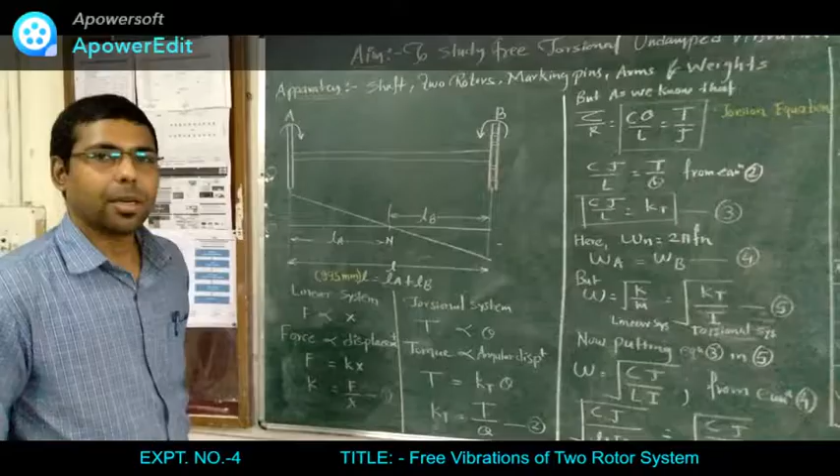Today we discuss how to study free torsional undamped vibration of a two rotor system. The apparatus required for this practical are a shaft, two rotors, marking pins, arms and weights. So let us have a look at the two rotor system first.

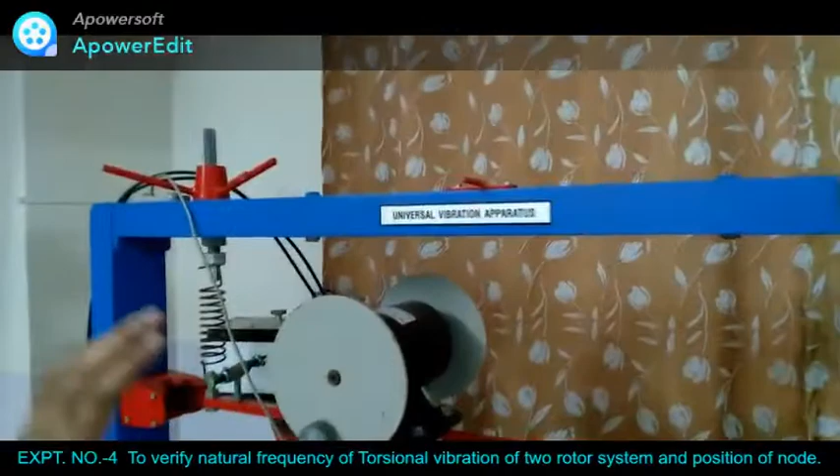So dear friends, this is a universal vibration apparatus on which we can conduct many experiments. This is the equipment for forced vibration, this is for the two rotor system which we are going to discuss today, and this is for torsional vibration which we will discuss later on. So first of all, let us have a look at this apparatus of the two rotor system.

There are two discs. This is disc A. This is disc B. Between these two discs, disc A and disc B, there is a shaft. You can see this is the shaft, and we are actually trying to find the frequency of the shaft.

On the basis of the torsional equation, we are going to find the node points of this shaft, and node points are those points where failure is likely to occur, and we'll be finding that right after. If you consider disc B, there are two holes. These two holes are there to mount the arm, as well as to locate the weight.

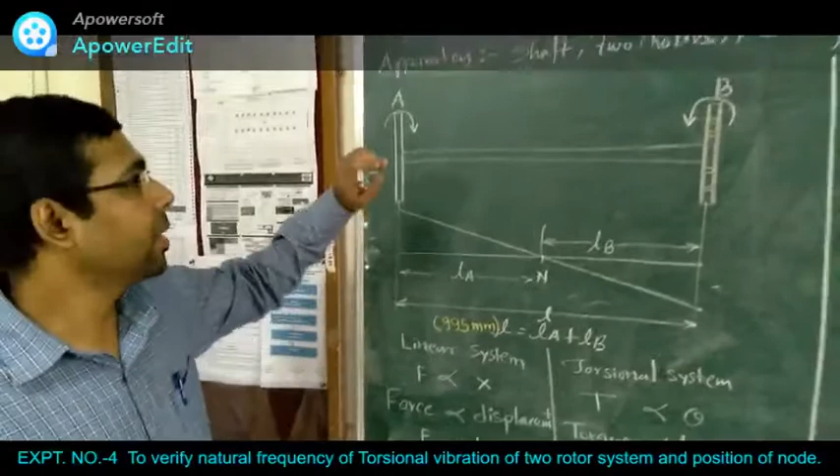So we will find the effect if we increase the weight on any of the discs. If we increase the weight, what happens to the node point is what we are going to observe from this experiment. So let us try to understand the theoretical part of this experiment first.

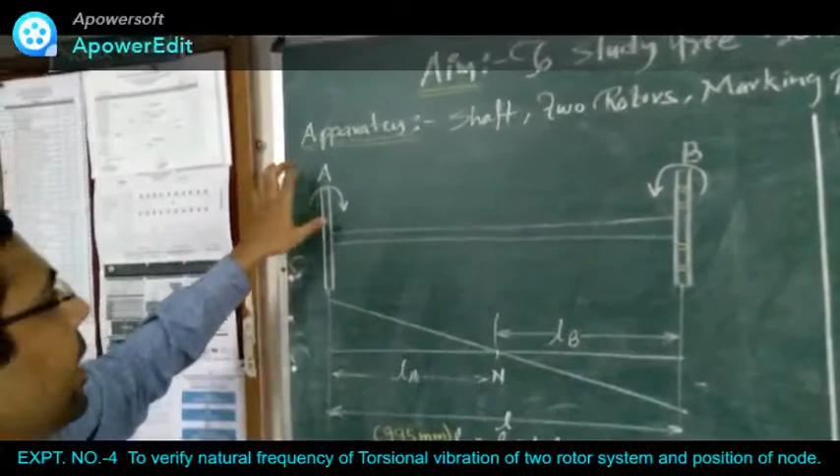This is a two rotor system with rotor A and rotor B, such that we will be rotating rotor A in a clockwise direction and rotor B in an anti-clockwise direction. After that, we will observe a T theta diagram like this, and in this T theta diagram we locate the total L as the distance between rotor A and rotor B, such that after twisting it, we will be able to find the node point N.

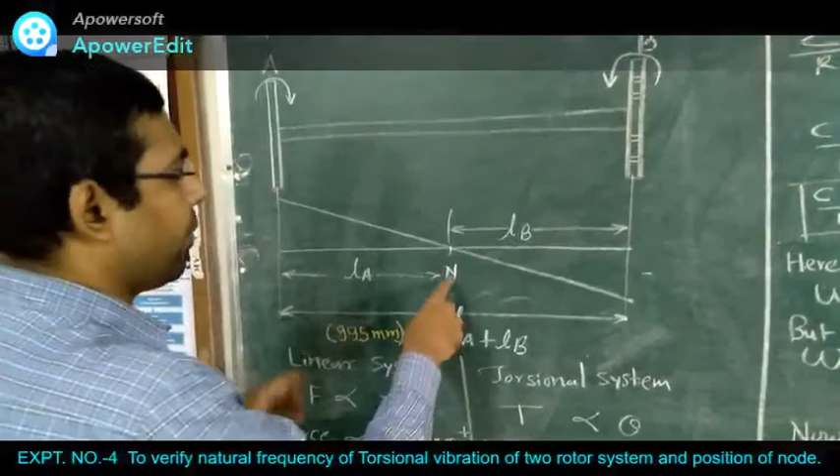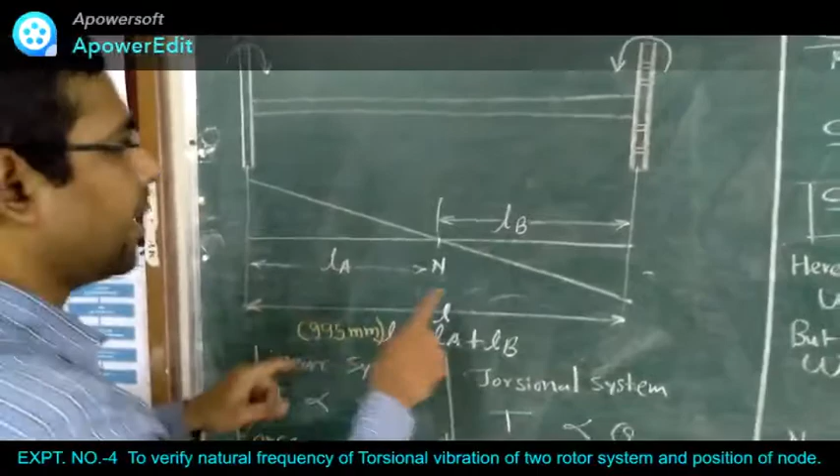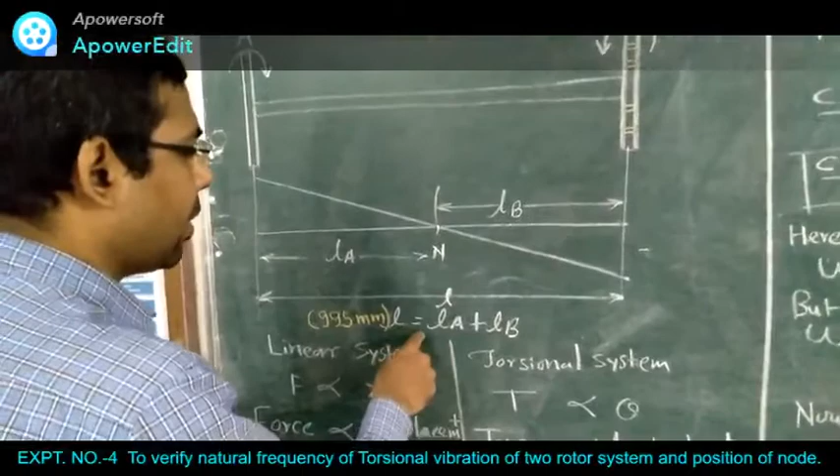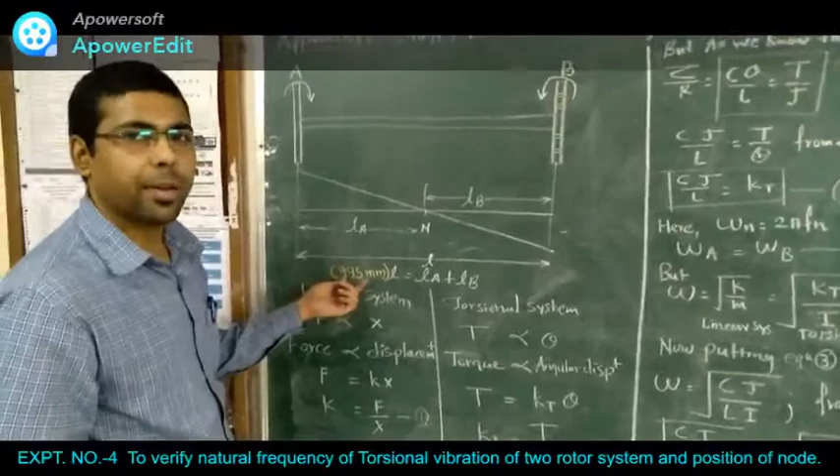So we consider the distance from the node point to rotor A as LA, and the distance of the node point from rotor B as LB, such that the total distance L is equal to LA plus LB. This is the theoretical concept we are going to study, and the total length of the shaft is considered to be 995 millimeters. It is actually 1 meter, but a certain amount of shaft gets consumed while fixing the rotors on it, so it is considered as 995 millimeters.

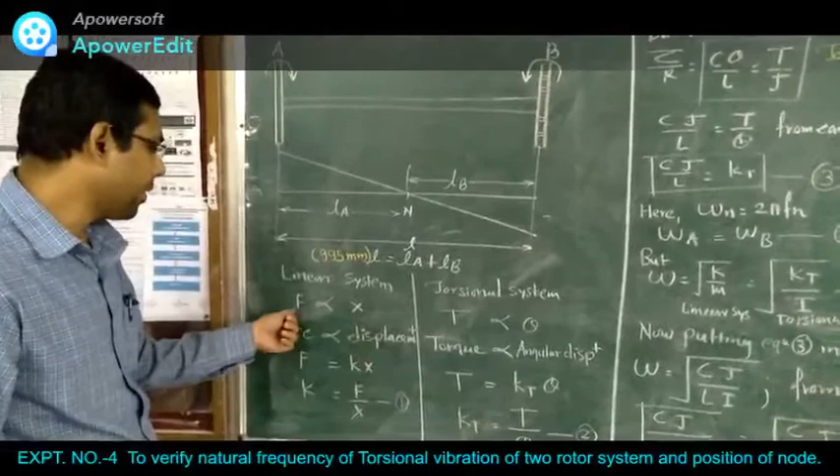As we know, there are two types of systems: a linear system and a torsional system. In a linear system, force is directly proportional to displacement. We take force as F and displacement as X. Generalizing this, force is equal to K into X, where K is the stiffness of the shaft. So in a linear system, stiffness is given as K equals F by X. This is the stiffness equation obtained through the linear system.

But consider the torsional system, a system like this where torque is applied. In this system, T is the torque, and torque is directly proportional to angular displacement, such that torque is equal to Kt into theta, where Kt is the torsional stiffness. So Kt is equal to T by theta. This is equation number 2.

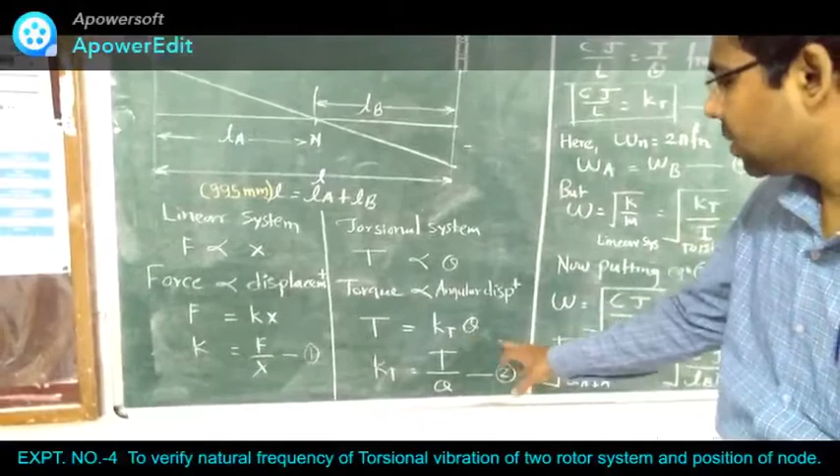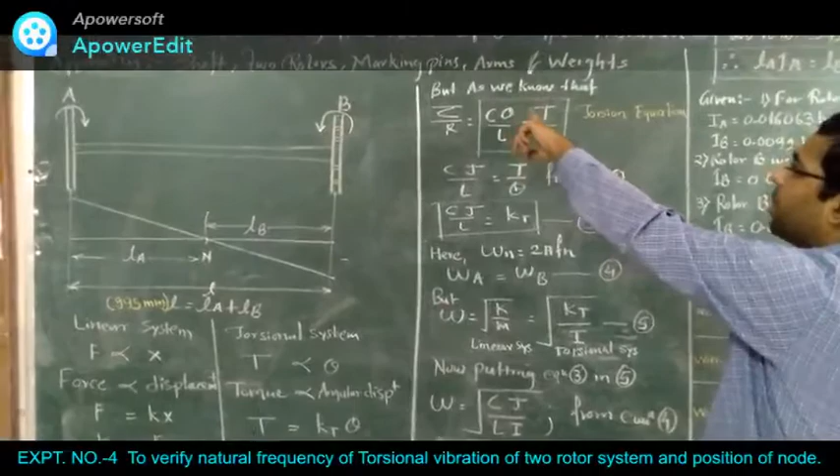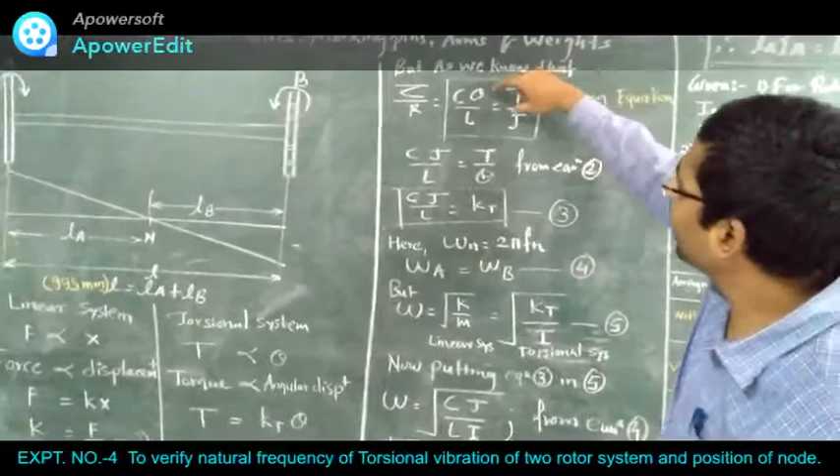After that, there is the role of the torsion equation in a torsional system. We consider the torsion equation, tau by r equals C theta by L, which is equal to T by J. This part of the equation we use for the calculation. As C theta by L is equal to T by J, rearranging these terms, T by theta is equal to CJ by L. This is the rearrangement we have taken here.

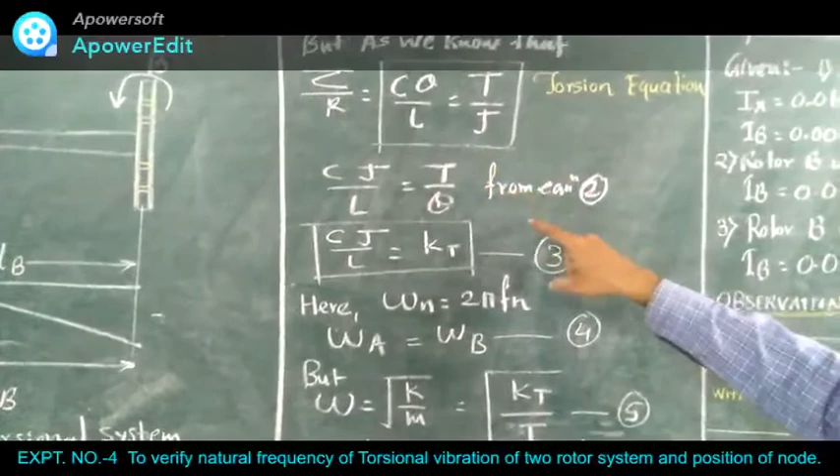So from equation number 2, as we know, in this equation we obtained T by theta and a certain value related to T by theta here.

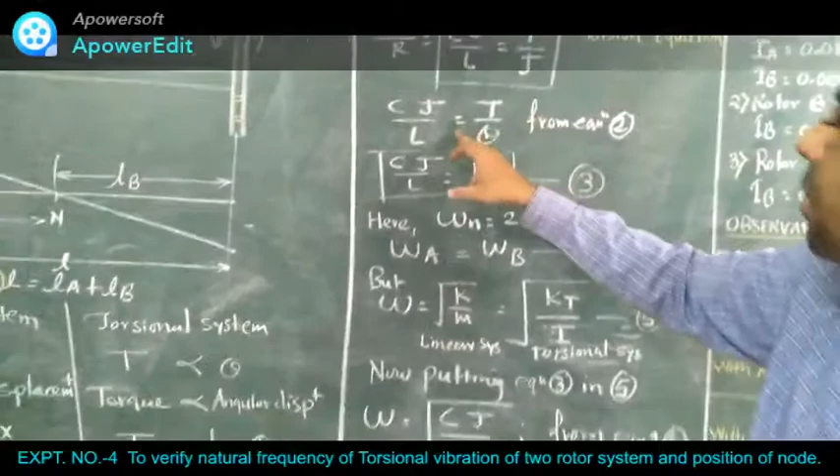So we can say that from equation number 2, kt is equal to cj upon l. So this is the equation which we are going to use for further calculations. Okay. So now here we are going to consider, as we know that omega n is equal to 2 pi fn.

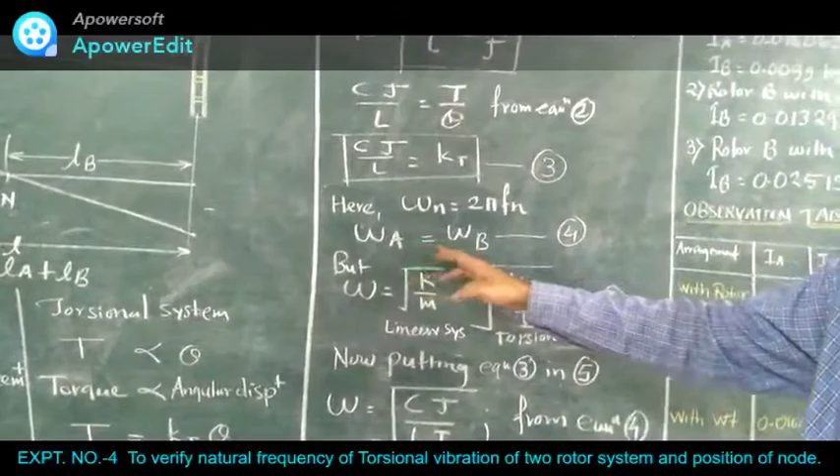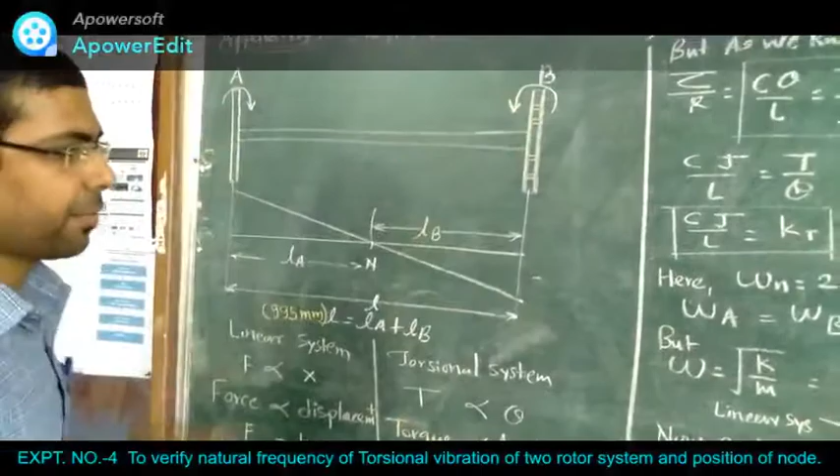And as we are aware about torsion, we can say omega A is equal to omega B, because the frequency of rotor A is going to be equal to the frequency of rotor B, since they both are mounted on the same shaft. So omega A will be equal to omega B, and as we know, omega is equal to under root of k by m, which is equal to under root of kt by I in case of the torsion equation. We are replacing k by kt and m by I.

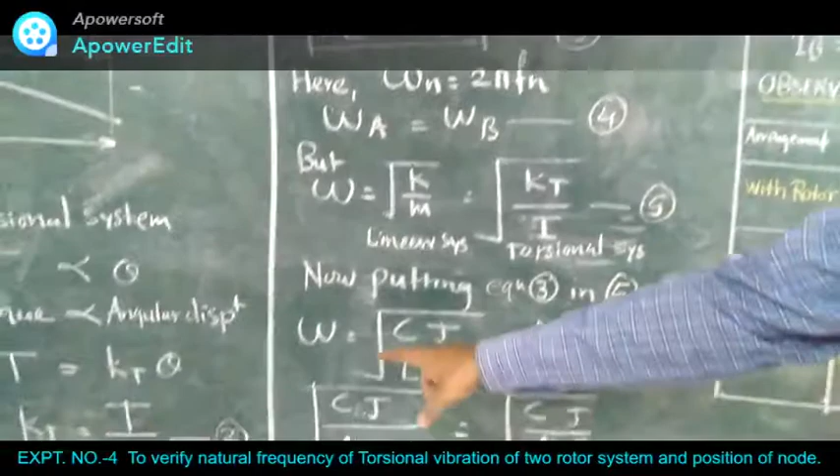As we know, k by m is for a linear system and kt by I is for a torsional system. Now put equation number 3 in equation number 5. By putting this value, we get omega is equal to under root of cj upon lI. Now we use equation number 4, which is omega A is equal to omega B.

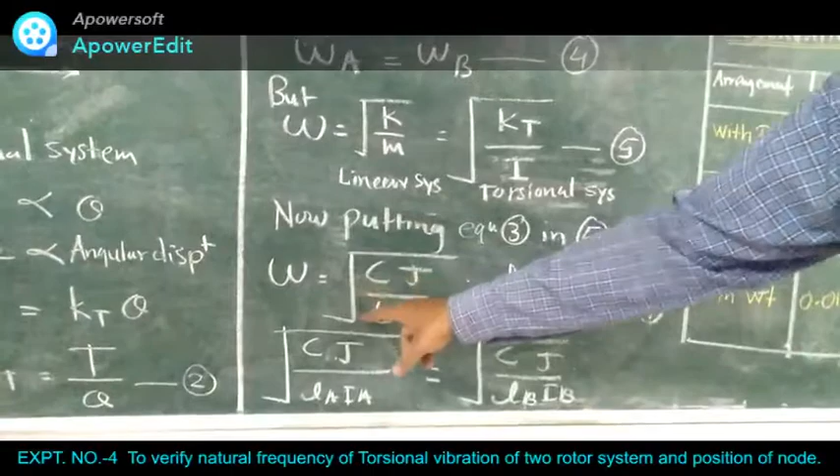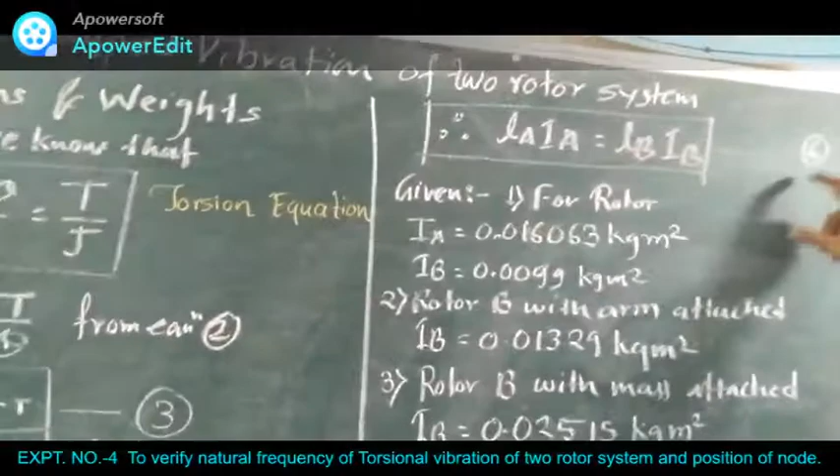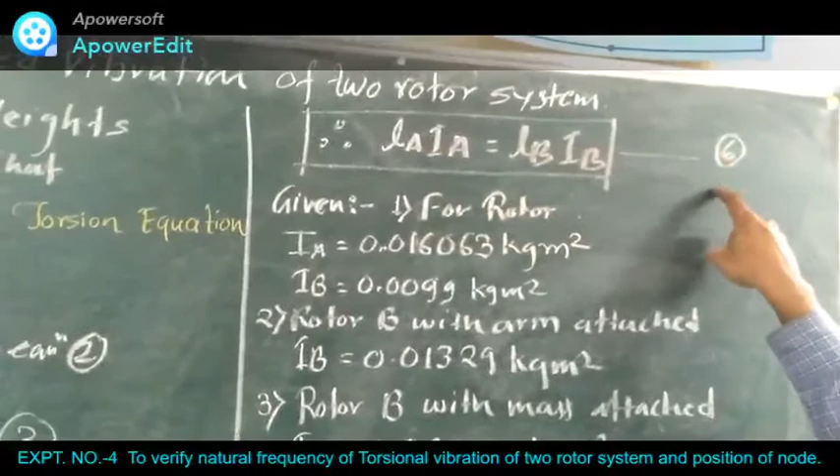By putting this value of omega, that is omega is equal to under root of cj by lI, in equation number 4, we get under root of cj upon lA IA is equal to under root of cj upon lB IB. By cancelling out similar terms and the root sign, we get lA IA is equal to lB IB, which is our equation number 6. By rearranging equation number 6 we can get the value of lA as well as lB.

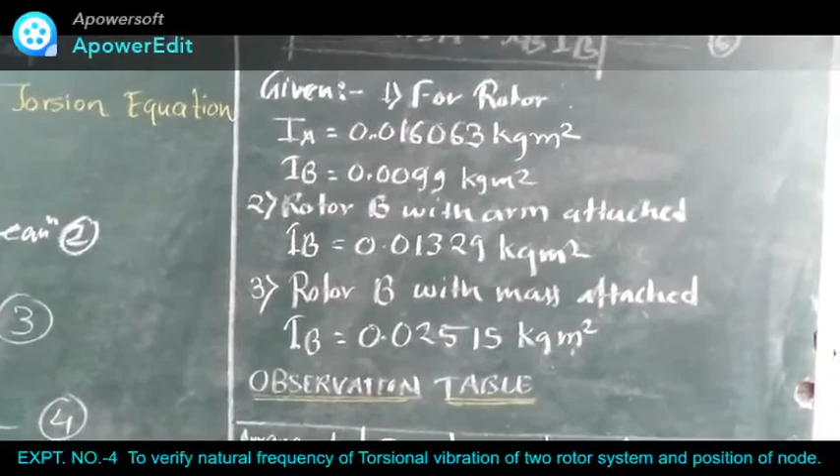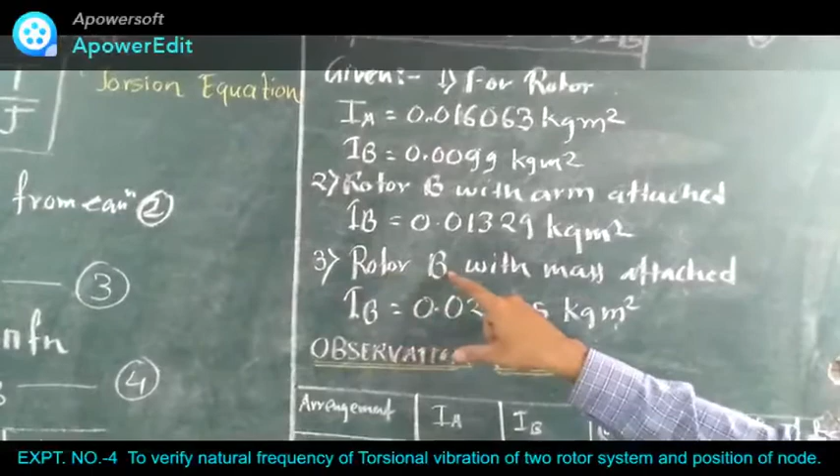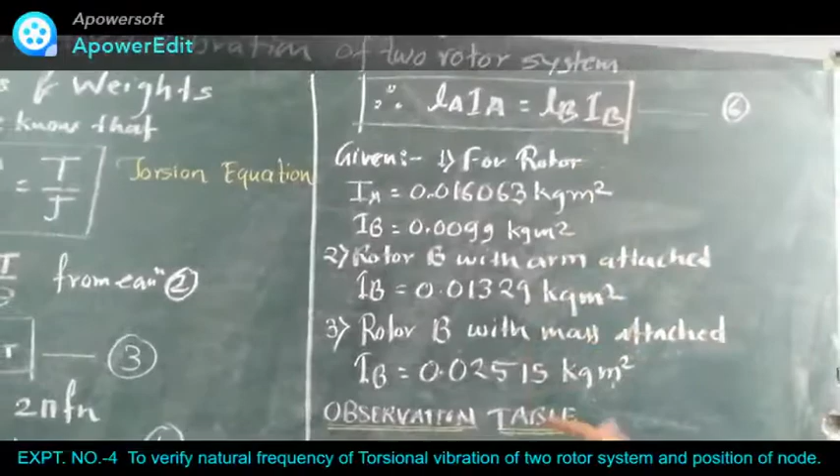Now we have certain values given in the specification. For rotor A, IA is equal to 0.016063 kg meter square, and IB is given as 0.0099 kg meter square. If we put the arm on rotor B, IB changes to 0.01329 kg meter square, and if we put mass on rotor B, IB changes to 0.02515 kg meter square. The observation table we will discuss later, after our experimentation.

So now let us have a look at our apparatus. This is our rotor A, and this is our rotor B. To rotor B we can attach arms and weights, and this is our shaft, and these are the jaws where the shaft is held.

If you want to measure the frequency of the two rotor system, we have to count certain oscillations. We can go for 5 or 10 oscillations, but let us take 5 oscillations. We start, stop after 5 oscillations and measure the time required, then calculate the time period for a single oscillation, and the reciprocal of the time period will give you the frequency. Okay, so let's get started.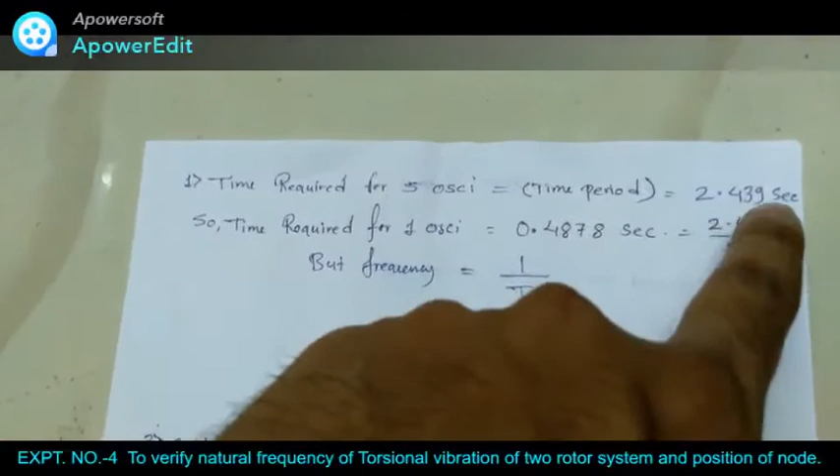So start, stop. Now you can see the stopwatch shows 2.43 seconds. In the calculation part, the time required for 5 oscillations is 2.439 seconds. So the time for one oscillation is 2.439 divided by 5, which is 0.487 seconds. Frequency is equal to 1 by time period, so 1 by 0.4878 gives f practical.

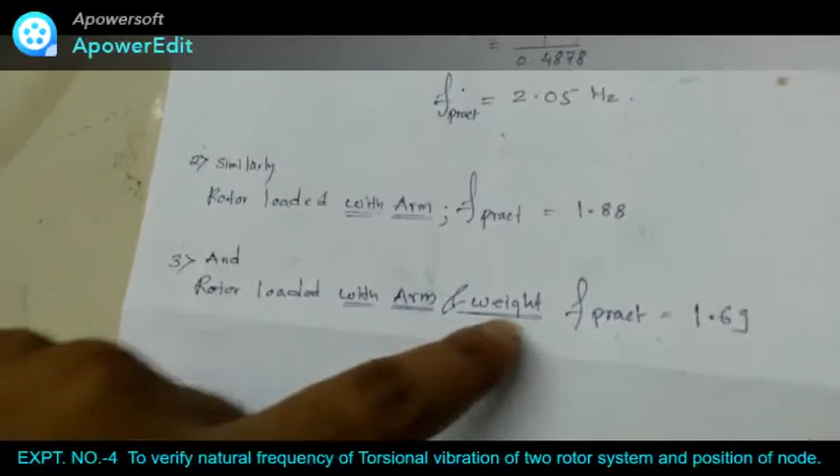It comes out to be 2.05 hertz. Similarly, we found the frequency with the rotor loaded with the arm, f practical is 1.88, and with the rotor loaded with arm and weight it is 1.69. How it is coming, we'll see in the practical. Now we are attaching arms to rotor B.

This is the arm to which we can attach mass also. So we are fixing both the arms. This is arm 1. So we have fixed both the arms, and now we are finding the frequency while loading the arm. After loading the arm, we are going to find the frequency of the rotor. So let's find it out.

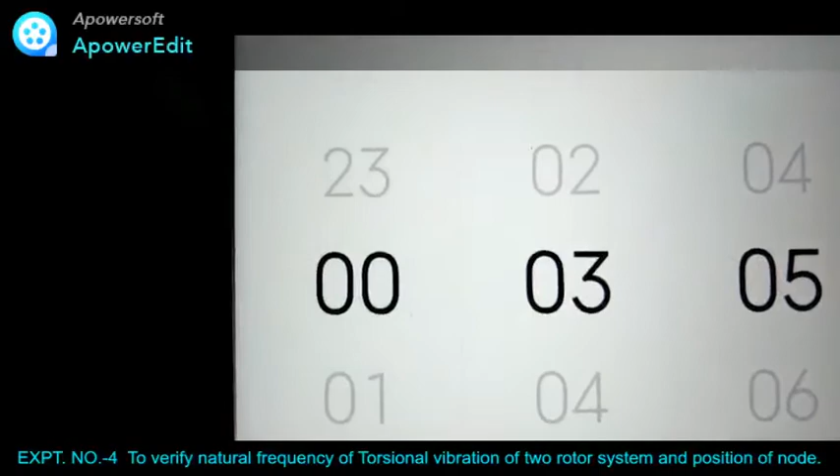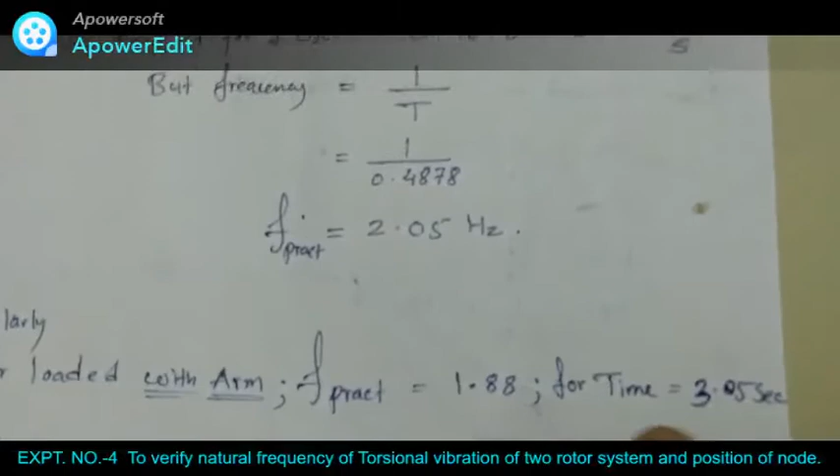Start. Stop. So now you can record the reading. You can see that it is coming out to be 3.05 seconds. So for 3.05 seconds, for the rotor loaded with arm, F practical is coming out to be 1.88.

Okay, now we are going to load the weights over the arm likewise. So this is the weight of 0.5 kg. We are loading it over the arm. So let us see the effect on frequency after loading the weight.

So let us count for five oscillations and measure the time. Start. Stop. After stopping, you can see the reading is coming out to be 4.55 seconds in the stopwatch. And now, for the rotor loaded with arm and weight, F practical is coming out to be 1.69 for 4.55 seconds.

We have seen how to find frequency through the practical method. Now we will try to understand how to find frequency through theoretical methods. In order to do so, we have to find LA, which is the length of node from rotor A, and LB, which is the length of node from rotor B, whereas we know that the total length of shaft is 995 millimeter.

So now let us measure the length through this strip. Let's measure the distance over here on the scale. It is near about 37.9 centimeters, so here we can write LA is equal to 0.379.

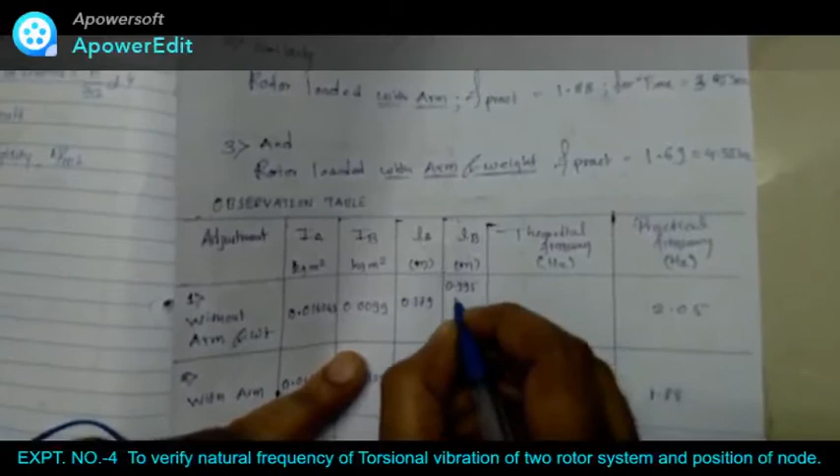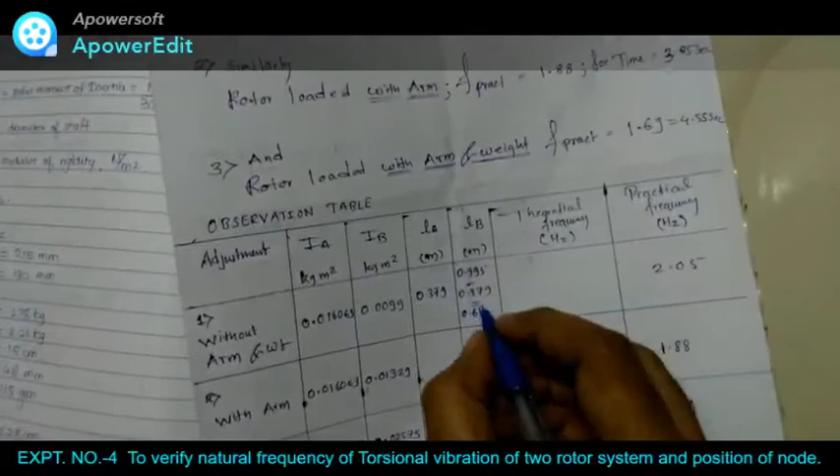So the rest of the distance will be LB, that is 0.995 minus 0.379, which is equal to 0.616. So this will be your LB and this is your LA. In order to find the theoretical frequency, we have to do some calculations. So let's have a look at the diagram first.

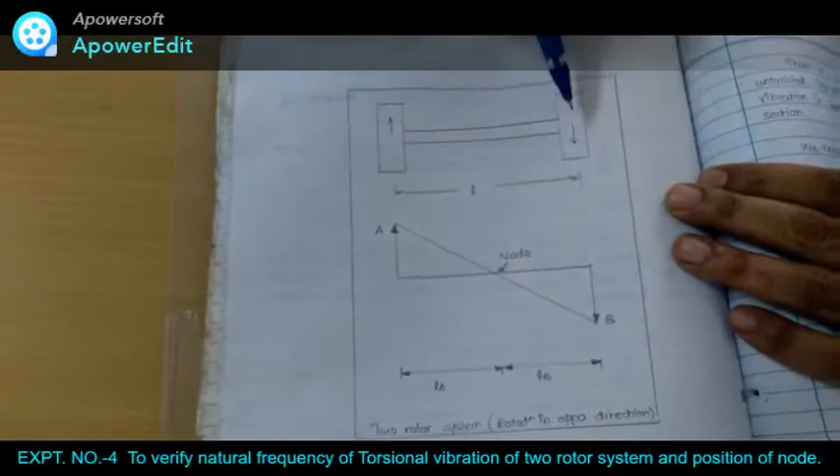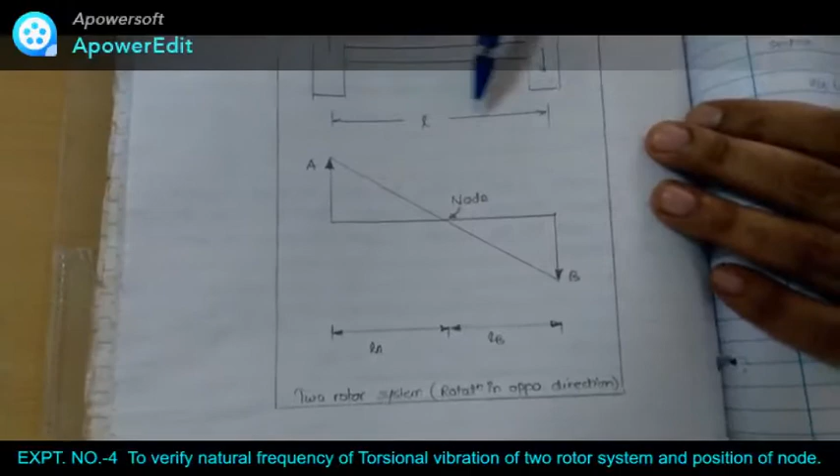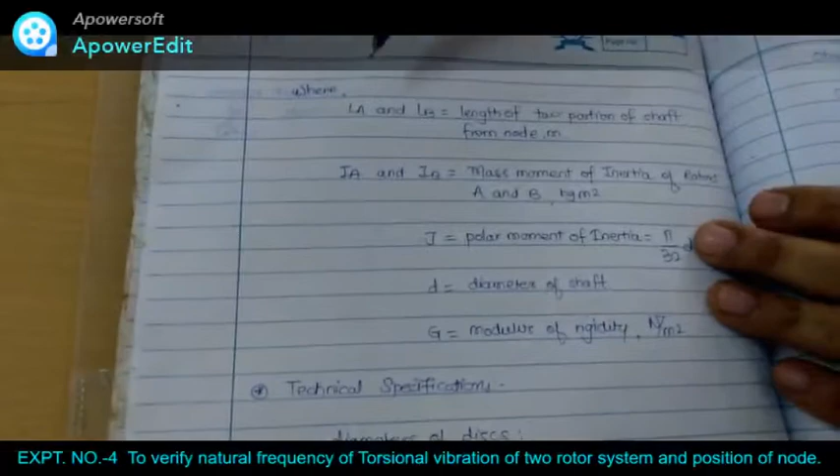This is rotor A, this is rotor B, this is whole length L, this is node point N, such that the distance of node point from rotor A is LA and from rotor B is LB, and this is the T theta diagram. Total length is equal to LA plus LB. LA and LB are the lengths of the two portions of the shaft from the node, IA and IB are the mass moments of inertia, J is the polar moment of inertia, D is the diameter of the shaft, and G is the modulus of rigidity.

Then we have the technical specifications of our system: disc A diameter is 215 millimeter, disc B diameter is 190 millimeter. Masses of the discs are 2.78 kg for A and 2.21 kg for B. Length of arm is 15 centimeter, thickness of arm is 48 millimeter, mass of arm is 115 gram, and diameter of the mass attached is 6.28 centimeter.

Mass attached to the arm is 365 gram. Length of shaft is given as 992 millimeter, but there is a little modification, it is 995 millimeter. Diameter of shaft is given as 3.32 millimeter, and modulus of rigidity is 0.84 into 10 to the power 11 Newton per meter square.

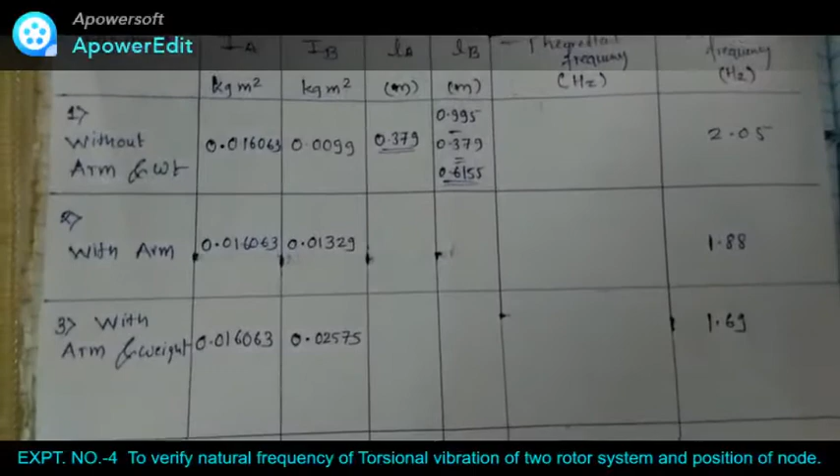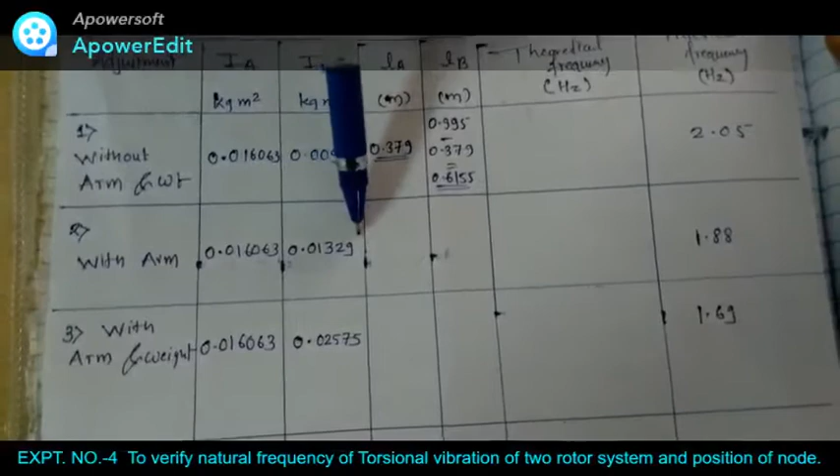So now as per our table, there are three adjustments. First is without arm and weight, second is with arm, and third is with arm and weight. So IA is common to all the three methods. Then IB is slightly varying: without arm IB becomes 0.0099, with arm IB becomes 0.01329, and with arm and weight IB becomes

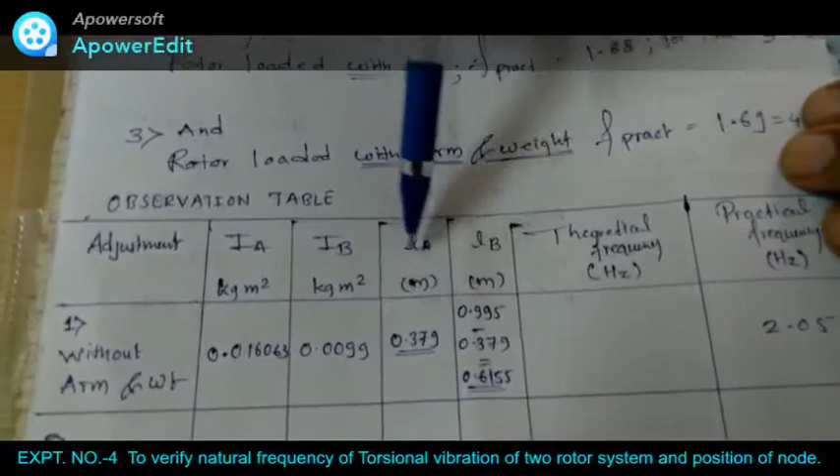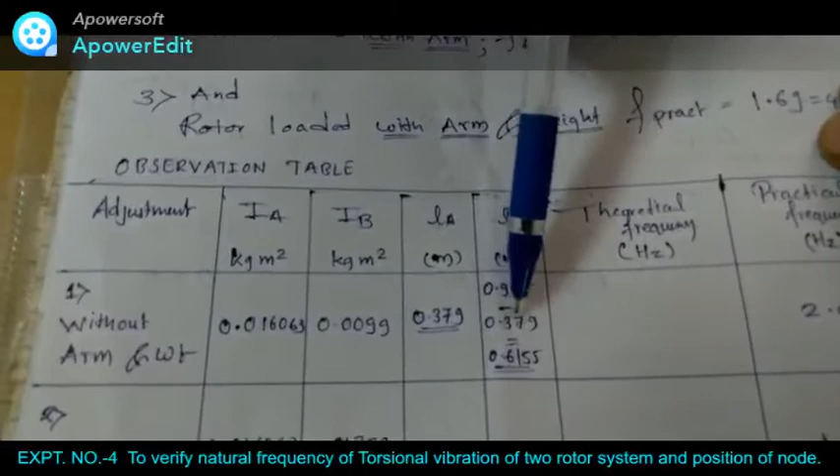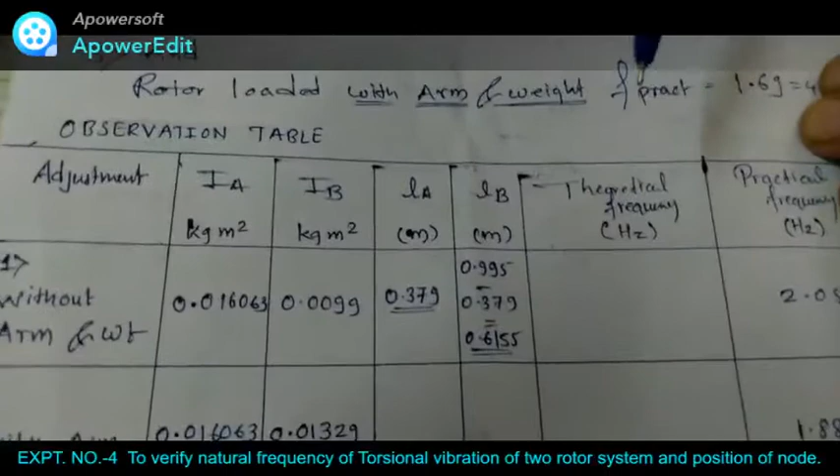0.02575. Right after that, as we found LA through the practical procedure, it is coming out to be 0.379, and LB is 0.995 minus 0.379, which is coming out to be 0.6155. So this is the way we find LA and LB. But now there is another case where we have to find the frequency. In order to find frequency, certain calculations are there for case number 1.

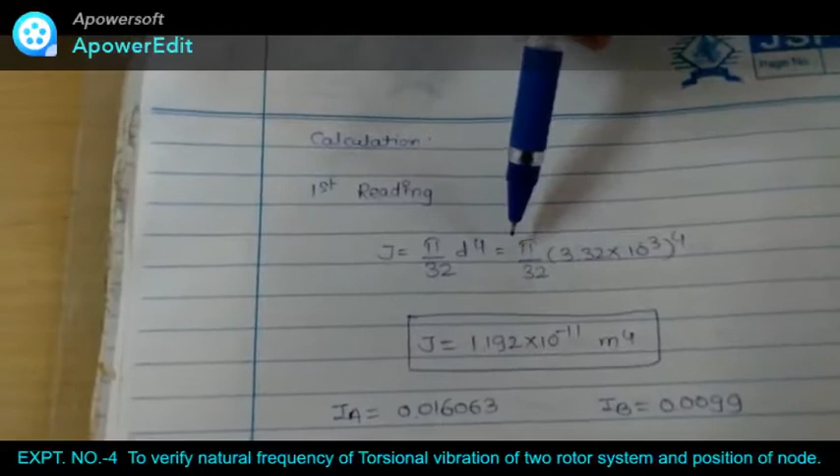For the first case, as we know that J is the polar moment of inertia, J is given as pi by 32 into d to the power 4, which is equal to pi by 32 into (3.32 into 10 to the power minus 3) to the power 4. So J is coming out to be 1.192 into 10 to the power minus 11 meter to the power 4. IA is coming out to be 0.016063, and IB is coming out to be 0.0099.

Putting all these values in equation number 6, which is LA IA is equal to LB IB, we are able to find LA, and LA is coming out to be 0.616 LB. But as we know that L is equal to LA plus LB, putting the total length of shaft, 995 into 10 to the power minus 3 meters, equal to 0.616 LB plus LB, we are able to find LB. It is coming out to be 0.61559 meters, as we found before.

Then LA is given as 0.3794 meters. Now putting these values in the equation of omega n: omega n is equal to under root of GJ by LA IA. Here it is noted G instead of C. G and C are the same quantity; both are modulus of rigidity. By putting the values we obtained, we find omega n is coming out to be

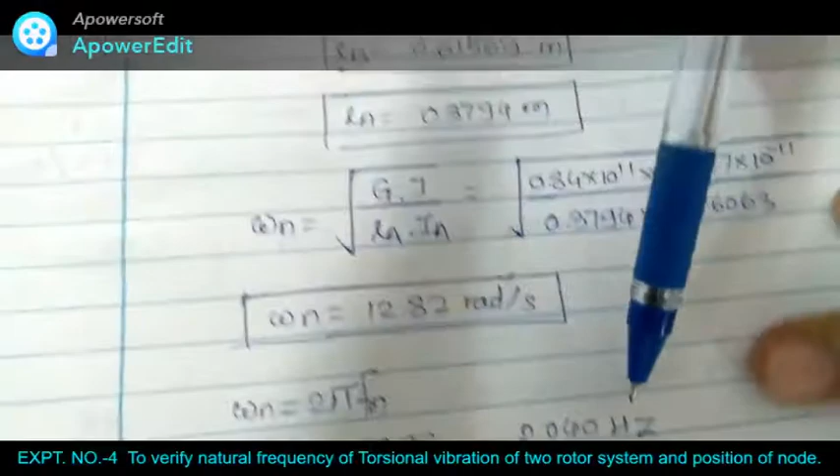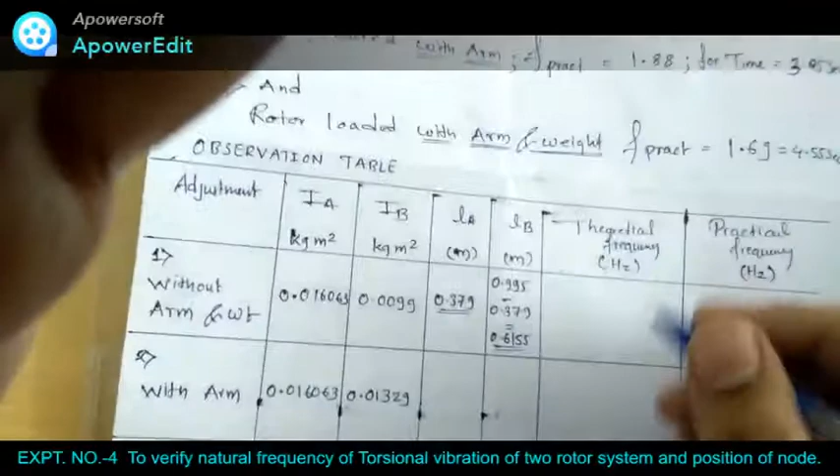12.82 radians per second. As we know that omega n is equal to 2 pi fn, fn is equal to 12.82 divided by 2 pi. So fn is coming out to be 2.040 hertz, and this is the theoretical value of our first case, and the practical value, as we found before, is coming out to be 2.05. So you can see the value obtained through theoretical calculation is 2.040 hertz. So this is the first case.

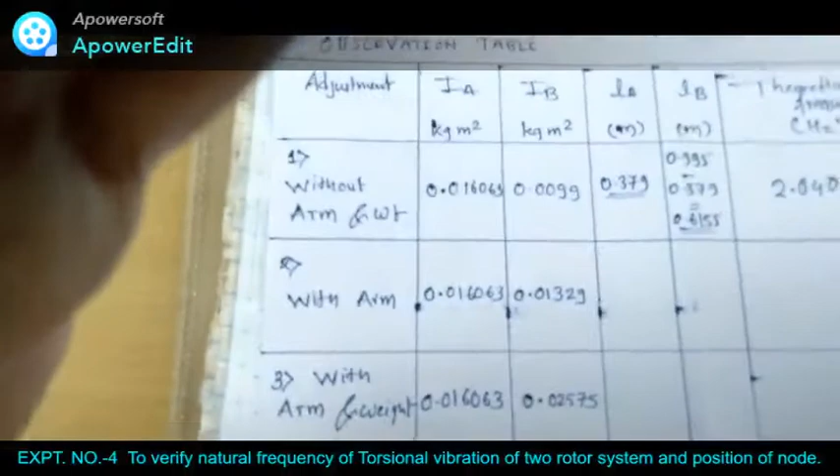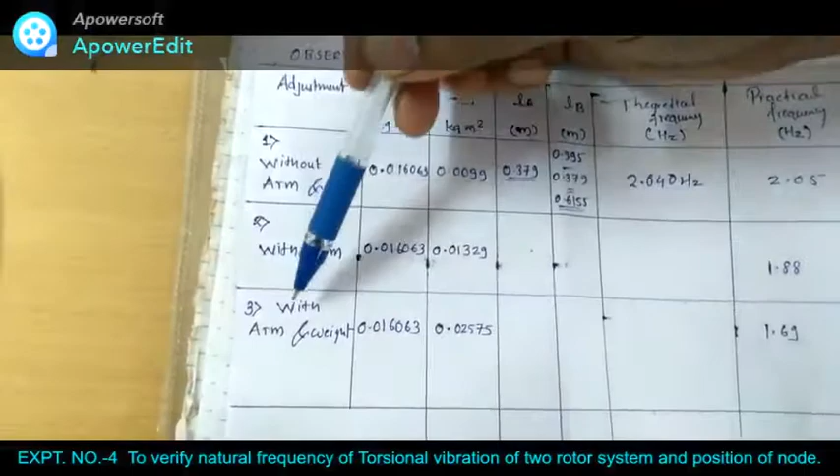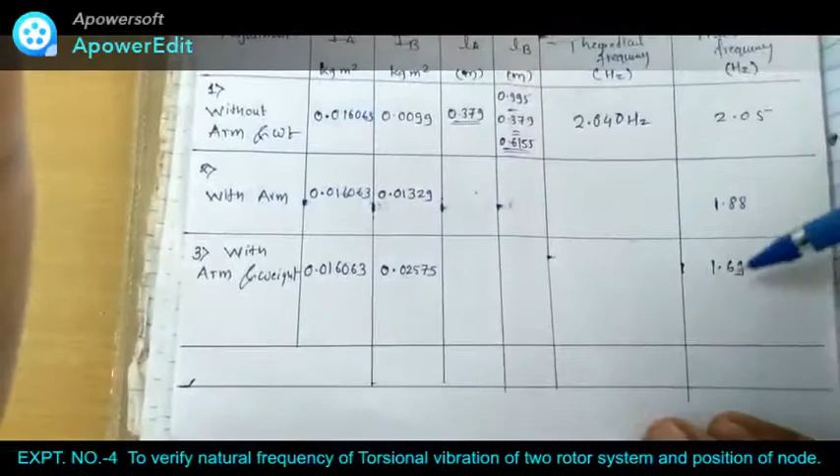Likewise, we can obtain the LA, LB values for the second case, with arm, and the LA, LB values for the third case, with arm and weight. The practical values are near about 1.88 and 1.69, which are mentioned here. Likewise, we intend to find the values through theoretical calculation, and we are going to validate them.

Now for the second case, we are putting arms over rotor B, this arm and this arm. Let us have a look at how it looks after putting the arms. This is how it will look after putting arms over rotor B.

Now again we have to repeat the same procedure. We have to twist rotor B in the clockwise and rotor A in the anti-clockwise direction, and then we have to locate this pin where it will get neutralized in its motion. We need to neutralize the motion of this pin.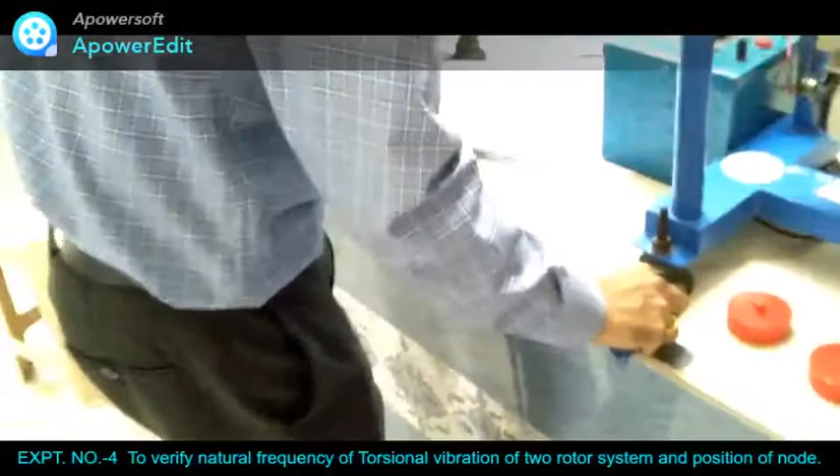Now let's measure the length of it. So we are having string with us. So now measuring the length. So it is coming out to be 450, near about. You can see the mark over here. Okay, so now putting the 450 mark over here, marking the length of A as 450.

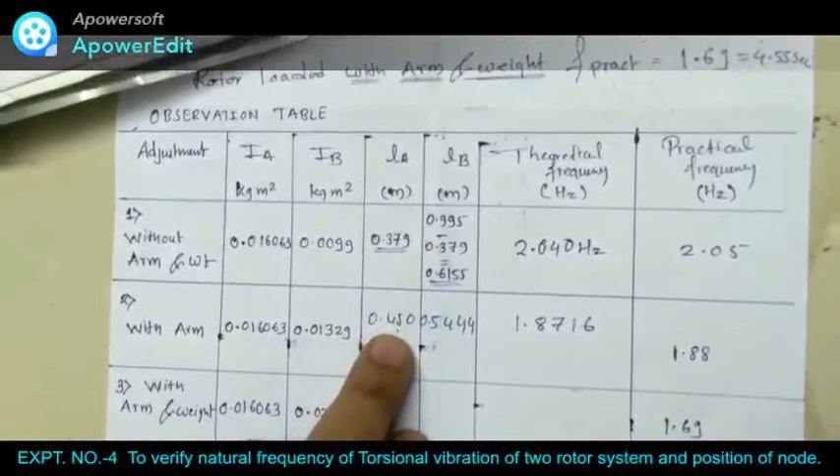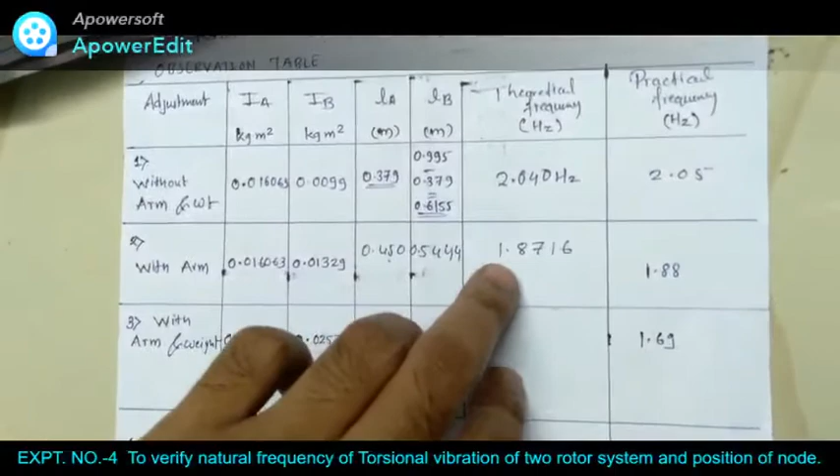Again, 0.995 minus 0.450 is coming out to be 0.544. So that will be the length of rotor B, and theoretically, by the same calculation as we have done here before, we can find that the frequency is coming out to be 1.8716 hertz. So this is the frequency of our second case. Now let us move on to the third case with arm and weight.

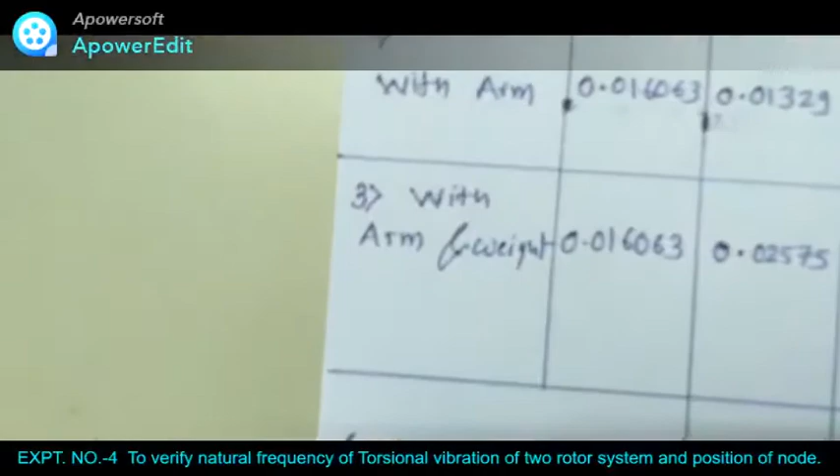So now the arms are already loaded to it. Now we are going to load weights over it. So this is the weight of 500 gram, or 0.5 kg. So we are going to locate it over here, on rotor B. You can have a close look over here. So after loading weights over here, you can have a look at rotor B, and rotor A is as it is.

So now let us have again twisting motion. After twisting, you can see that again the pin is moving in the direction of rotor A and this pin is moving in the direction of rotor B. There is biased rotor motion, but we are looking for unbiased motion of the pin, neither in the direction of rotor A nor in the direction of rotor B. Now again we are shifting the pin and trying to neutralize its rotation. Again we have to try for its neutral location.

So it will be taking time for getting neutralized in its motion. Again it is moving. Again it is having a certain biased direction of motion. So again we have to twist it. Again we have to see the motion, how it is moving. It should be neutralized in its motion. So it is now following the motion of a certain rotor, but we have to again try to neutralize the motion.

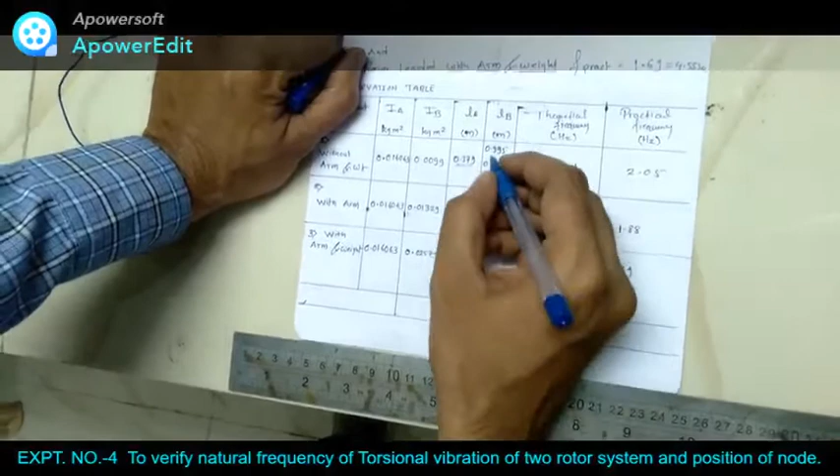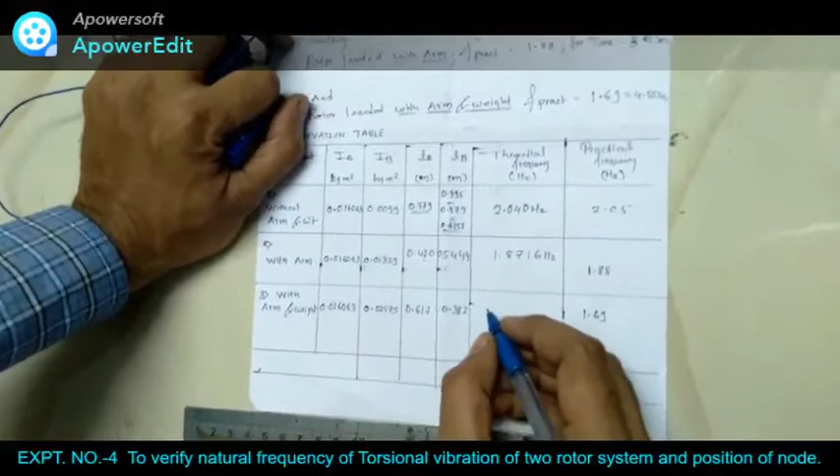See, now the distance is coming out to be 61 point something centimeter. So you can write over here the distance as 0.617, and 0.995 minus 0.617 is coming out to be 0.382, and after doing the calculation we are able to find the frequency as 1.6042 hertz. So it is near about the same as that of the practical value.

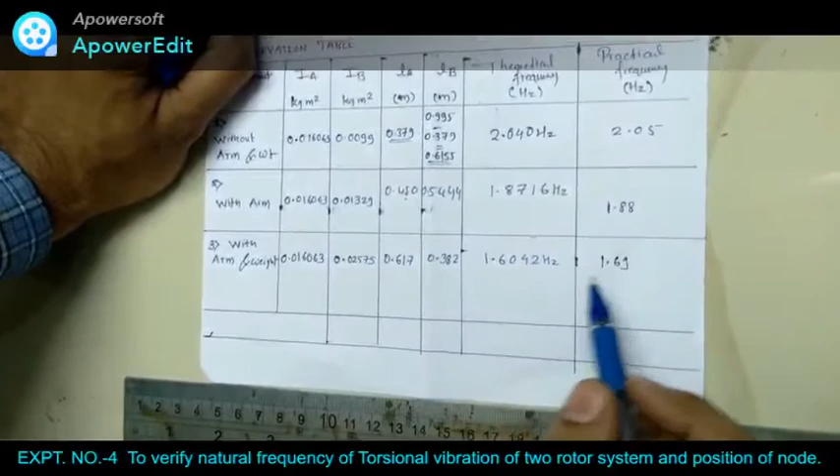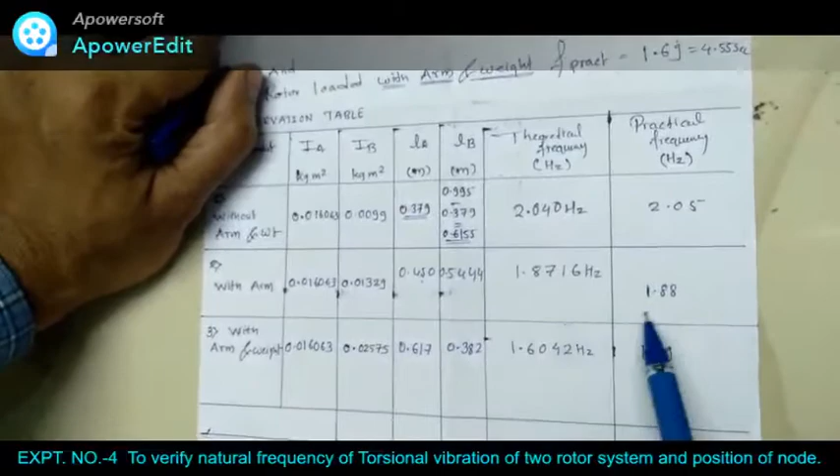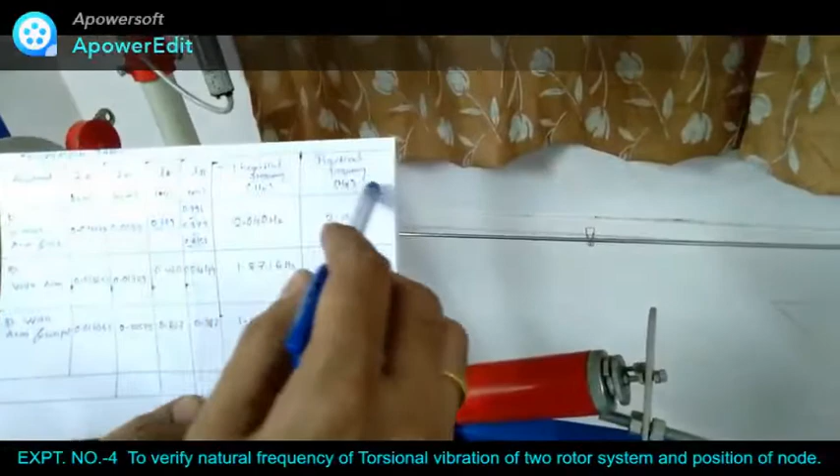You can see the theoretical value and practical values are matching each other. So there is hardly any kind of error or difference between them. So to conclude, as we find length of A, length of B, the node point over here, and theoretical and practical value, there is hardly any difference between theoretical and practical value. So you can conclude that as the rotor B is loaded with the mass, the node point is going to get shifted towards rotor B.

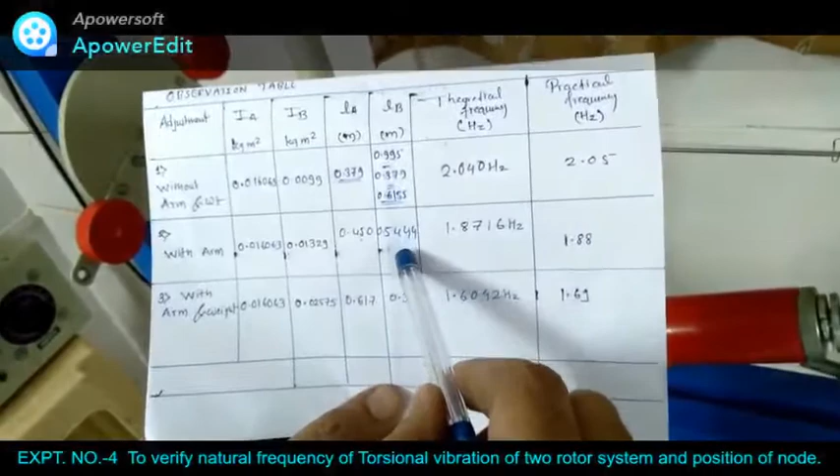You can see over here that the node point is shifting towards rotor B, because in the prior case we were having the value of rotor B, LB, as 0.6155, which is far from rotor B, and when we attach the arm to it, it was having a value near about 0.5, which is a little bit nearer than the earlier value. And when we attach mass to it, the value comes out to be 0.382. So the node point gets shifted when we add the weight over the rotors, and this node point is shifted towards rotor B.

Likewise, you can see over here that these node points are going far from rotor A and shifting towards rotor B. So this is the conclusion of the experiment: in the case of a two rotor system, the node point is going to get shifted towards the weighted side rather than the lighter side.